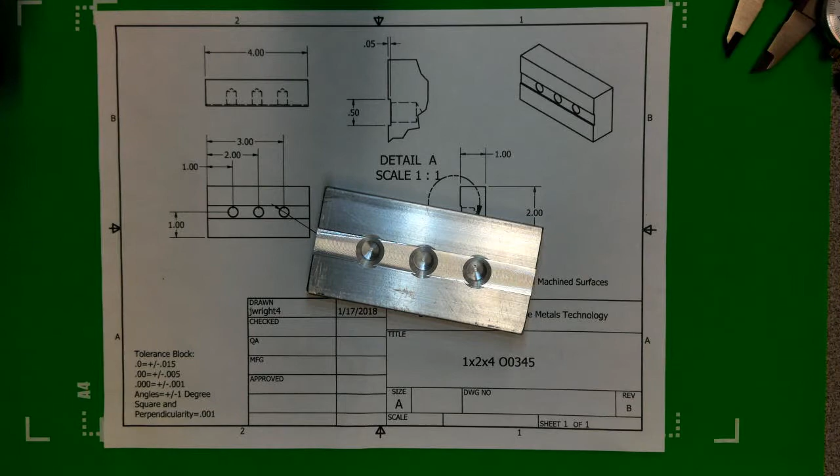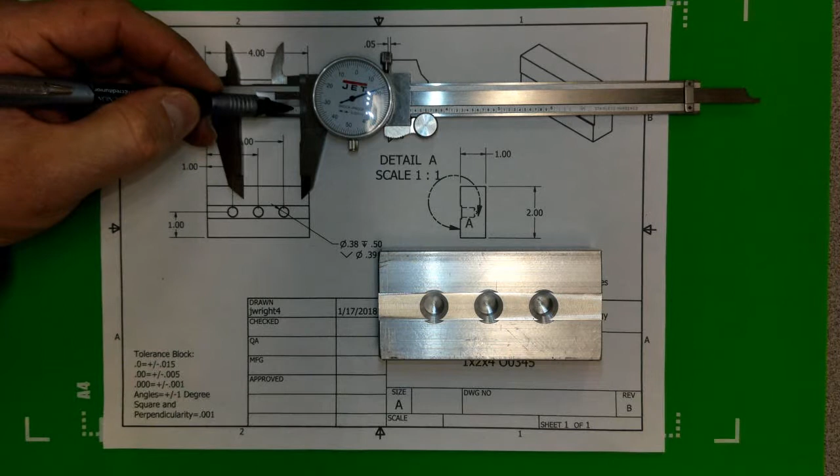I brought one of the calipers that we were using in class, and remember this one, the dial just goes to 50. Even though it goes to 50, we're just going to assume this is 60, 70, 80, 90, 100 as we go around. This caliper measures 6 inches. It'll measure just a little bit over 6 inches if we need it to. This is our 1-inch dimension here. It has to go past that point for us to be able to actually get a good dimension off of it.

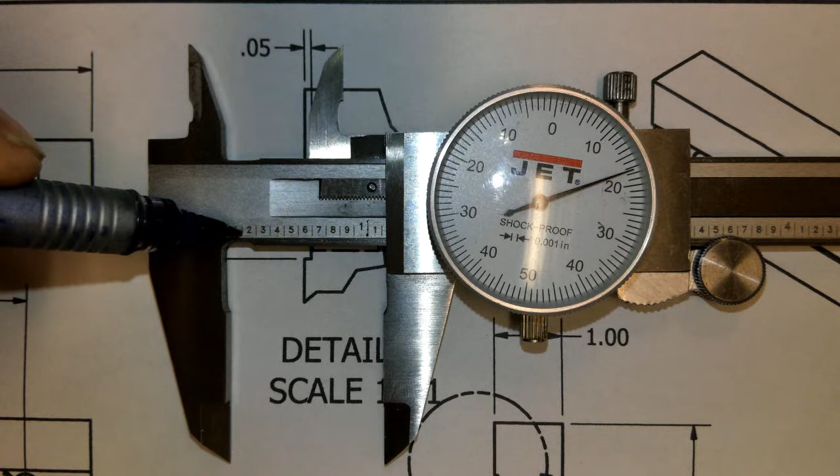So as we come in, we can kind of zoom in here, see the motion on this caliper, how it works. So this is 100 thousandths. It doesn't become 100 thousandths or more than that until you see this line right here. 200 thousandths, 300, all the way up to 1 inch. Anything after 1 inch, what the caliper is reading right now is 1 inch, 100 thousandths, and then another 17 thousandths after that. So we are at 1 inch, 117 thousandths on this particular 6-inch caliper is what it's showing us.

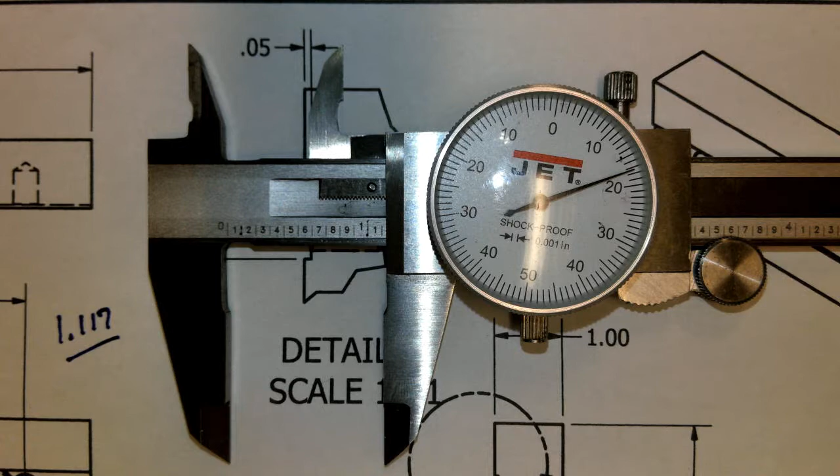So I'm going to go ahead and take a couple of quick measurements on the part, just so we can see what we've got, make sure that we're reading and understanding the caliper. The print for the part is on here. We've got our tolerance block down here. That tells us what we're working on and what we can get away with tolerance-wise. So our stock is 2 inches and about 11 thousandths is what is reading here.

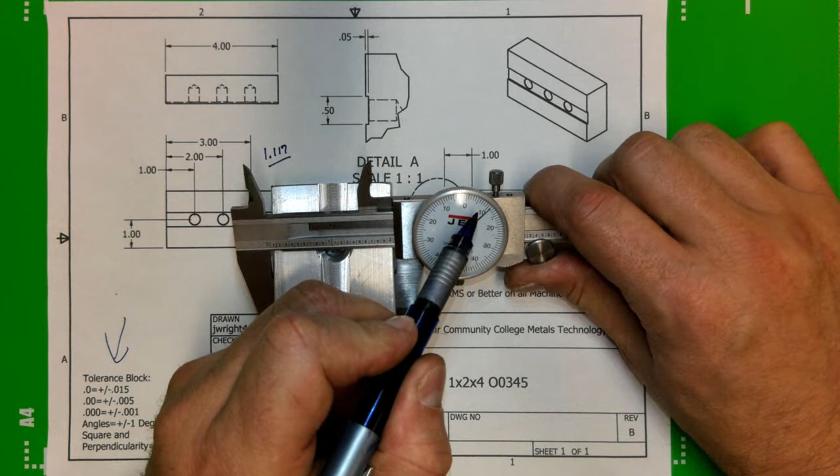So there I have 2 inches. It's past the line there, 2 inches. Now we're all the way over here. That's 5 thousandths, 10 thousandths, one more. That's 11 thousandths. So on our part, this dimension is 2.011. So 2.011, we have a 2-place decimal. The 2-place decimal has plus or minus 5 thousandths tolerance on it. And that tells us this is already out of print. So this dimension is out of tolerance.

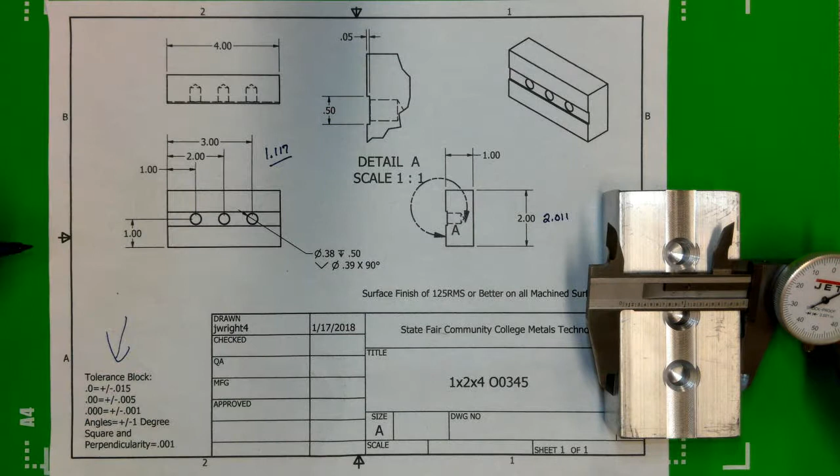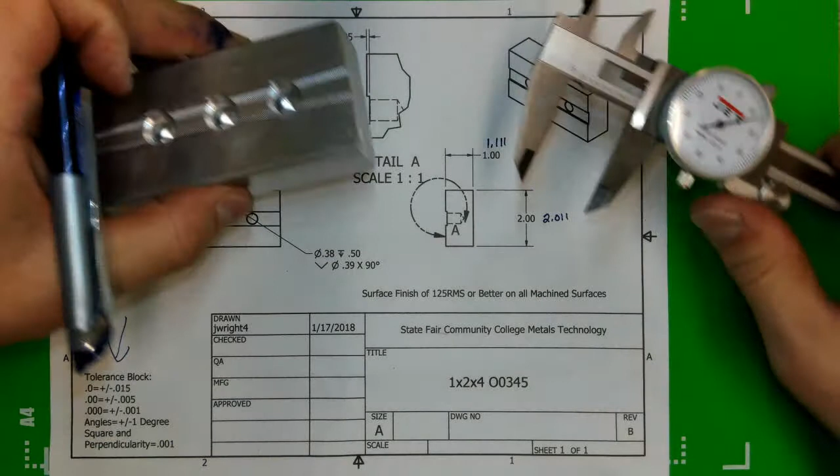So we look at our 1-inch dimension. Our 1-inch dimension is also oversized, and that's really common when we're talking about stock. And it is 1 inch, 111 thousandths as well. So we come back in here, take a look at that, and 1 inch, 111 thousandths. Saw length on this. This thing's supposed to be 4 inches long. It's just sawed to length. So we are way long on this.

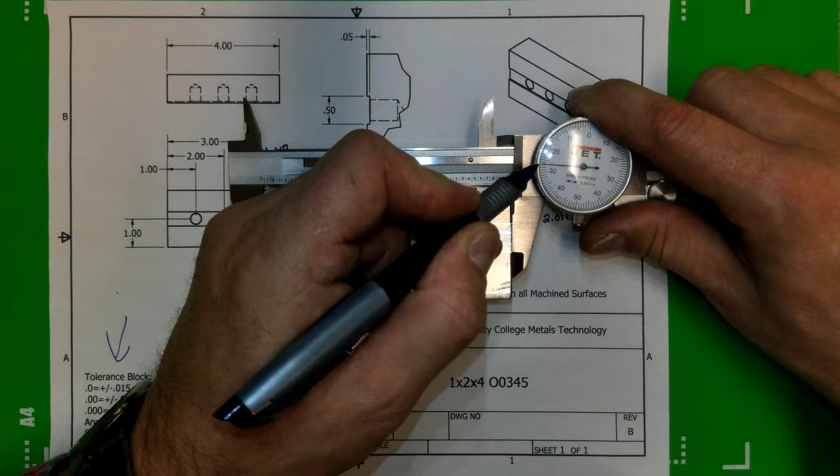This scale, we're going to read it at 4 inches. We haven't surpassed the 1 yet. So 4 inches, 50, 60, 70, 71, 72, 73 thousandths. So 4 inches, 73 thousandths for that dimension. Remember, we're always talking in thousandths. So as I read that, I've got 4 inch, 73 thousandths is how I would read that.

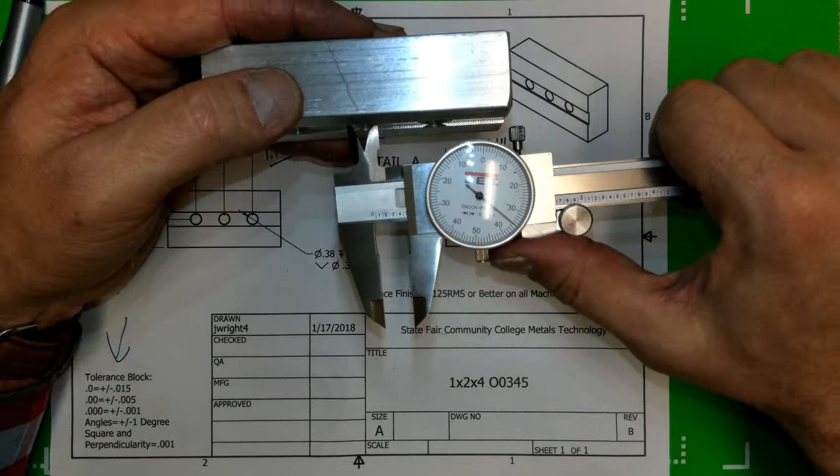Take a couple quick measurements of our holes just to give you the idea of measuring inside with this. Measure my hole. It's supposed to be a 3/8 hole. 380 I think is the dimension on it. So as I come up here, I have not gone past the 400 yet. I can see the line for the 3. This is 300, 350, 360, 374, 374 for the hole.

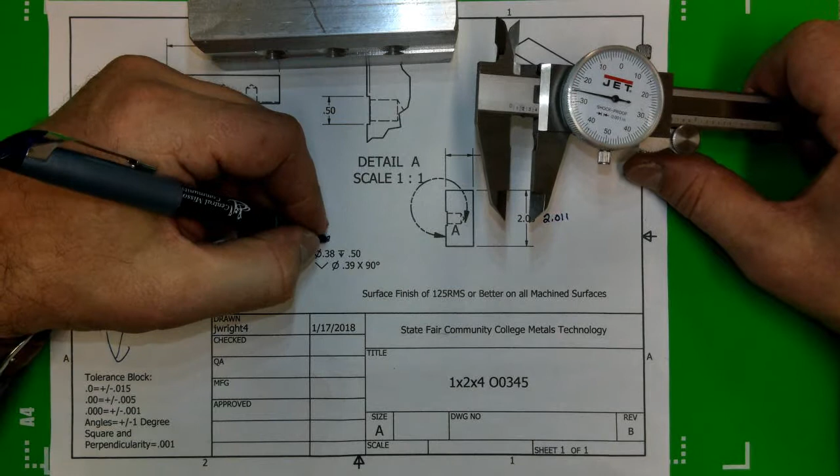That was probably done with the 3/8 drill, so it's really probably 375. Remember, on our calipers, we want to try to stay within about a plus or minus 5 thousandths dimension on that for calipers.

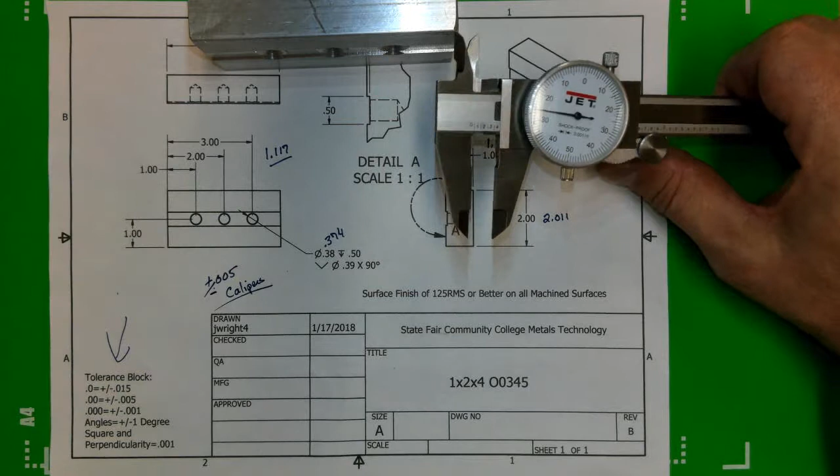Don't want to try and hold 1,000th tolerance on that. So we're just using this as a reference on this. This is not something we want to take a lot of critical dimensions where we might be measuring in 10 thousandths of an inch or even 1,000th of an inch.

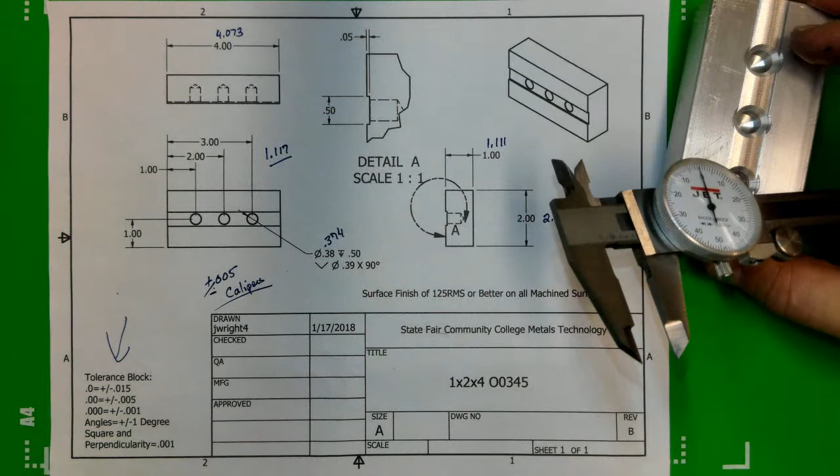So I can measure my slot width. Slot width is supposed to be 1/2 inch. I'm dead on 1/2 of an inch here. So 500 thousandths is what that is, and then I had 500 thousandths or 1/2 of an inch.

Last thing I want to measure is I want to show you a couple different ways that we can measure the depth. The depth of this slot right here should be 50 thousandths. I can do it a couple different ways. I can come in here and I can take this backside edge, set it down into the slot, measure it this way, 39 thousandths.

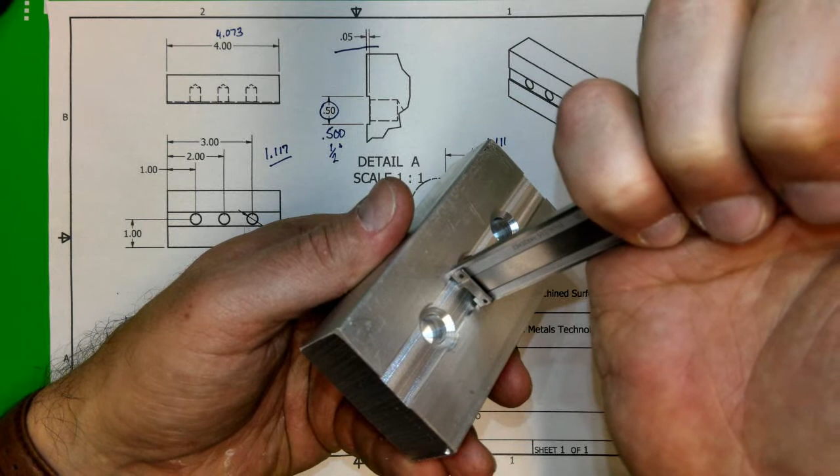I can come down here and I can measure it this way. So I'm spanning the slot. And I'm just going to pull it down. So there, come back over here, measuring just a little bit differently here, a couple thousandths difference in there.

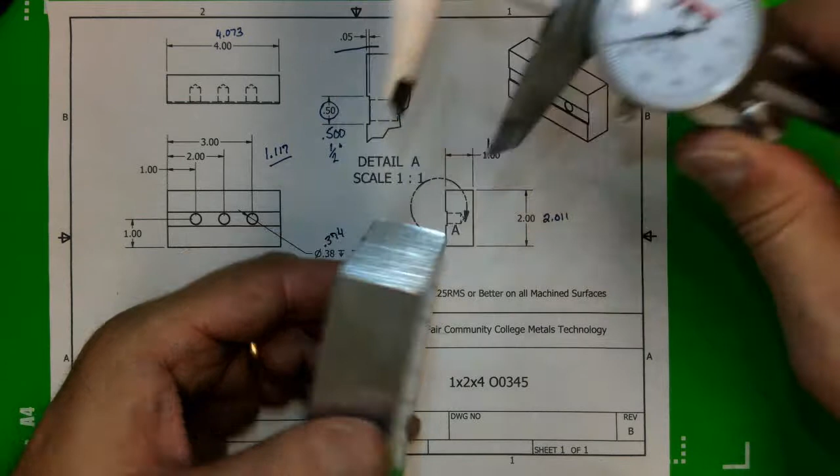Another way I can do it is to take the overall thickness of it, then measure the depth of the slot, and then I can come in and about the same, pretty close. Remember, the bottom of this thing is not machined, so it's not going to be perfect. It is short though, so we're at 39 thousandths, I think is what we were. Should be 50, so we're 11 thousandths out on that. So that's, again, not a good part.

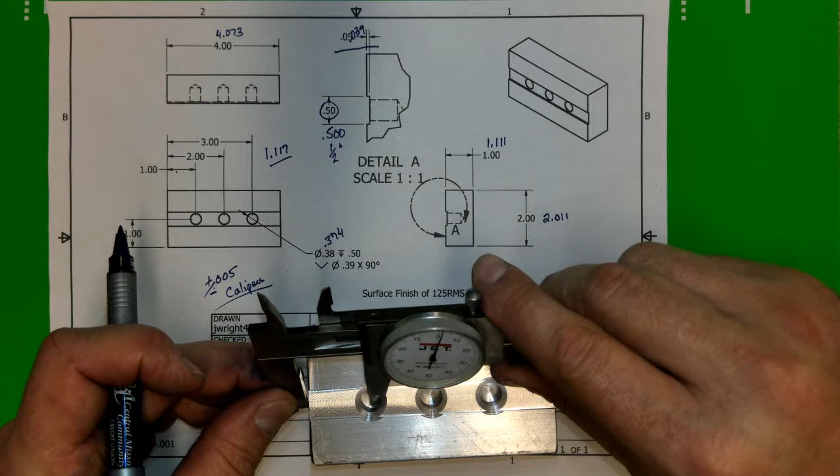When we're checking for our hole spacing, this hole spacing should be 1 inch, 2 inch, 3 inch. Coming from the side, we want to be able to measure to the center of the hole. So I can come in here and, yeah, I can eyeball this to the center of the hole. That's one way to do it. But if I want to be close on my measurement, I want to measure over to the edge, add the radius of the hole. That'll tell me where the center point is.

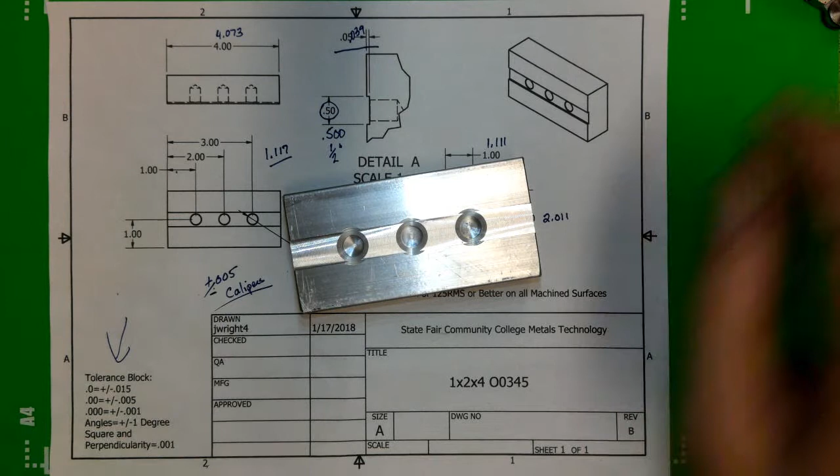On these, there's going to be quite a variation on there. Just saw cut on the side. Remember, we just made these as some sample demo parts that we were making for some other projects, just to give some people an idea of what the CNC mill looked like.

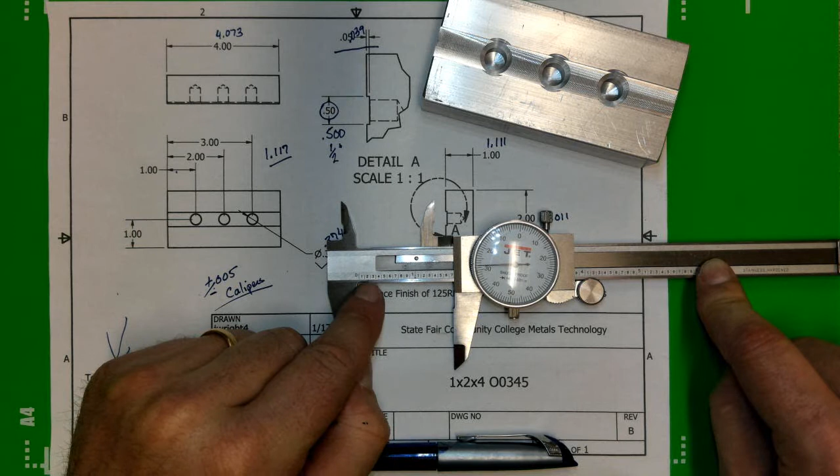All right, so remember, when we're looking at the caliper, we have graduations that go from 1 to 6 on this particular caliper. This is a 1 inch mark. Anything coming up to that is just 100 thousandths, 200 thousandths. So we read that like this: 0.1, 0.2. Then as we read on the dial, we have 10 thousandths, 20 thousandths.

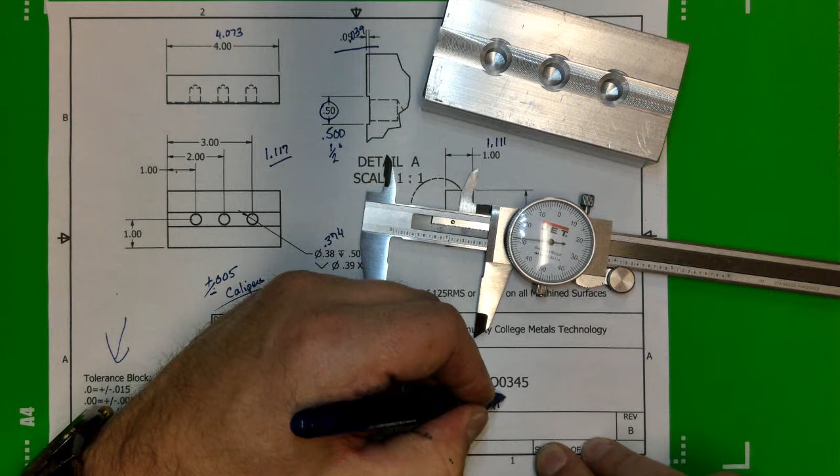Each one of these increments, from dash to dash or line to line, is 0.001. That's 1 thousandth of an inch, and so we're just adding that to it. So 10 thousandths, 15 thousandths, 20 thousandths, 30 thousandths, 40 thousandths. Right here would be 42 thousandths. So we're just adding those together.

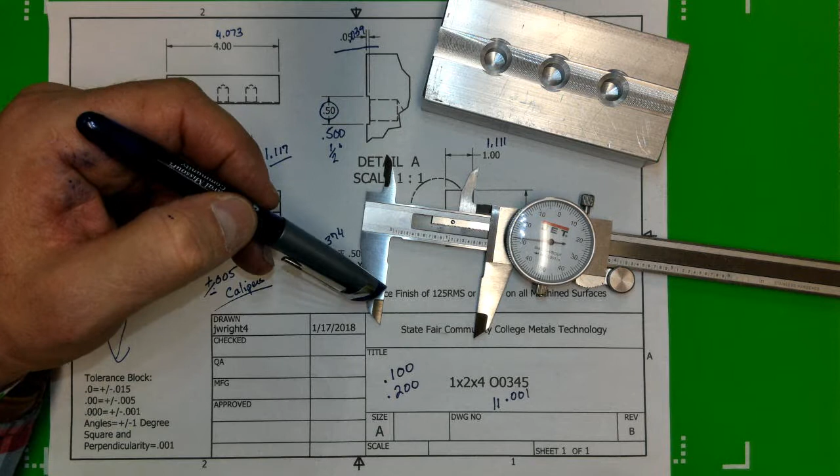Remember, when we're measuring, I don't want you to squeeze on there. Don't try and force the dimension out. Just let it be what it is. Just lay the blades down on there. Just hold pressure on it, but don't push too hard. And just read what it says.

Don't try and make a dimension read right, because just because you can make it read right doesn't mean that once it gets to inspection that it's going to be the same. So they're not going to try and force that dimension. All right, so that's just a recap of what we were talking about today.